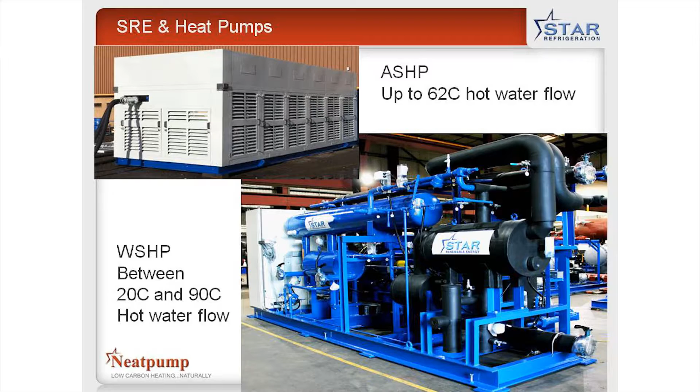And then there's the water source ones, which are the first thing we got into. And we've done several of these. We've done one that takes heat from a fjord. We've done one that takes heat from the cooling process in a dairy in the south of France. There's one that takes groundwater underneath Zurich. There's one that takes heat from the new harbour that they built for the Norwegian army.

And the most recent one is taking heat from a solar farm where the heat is given to us at about 55 degrees and we boost it up to 80. I'm not going to say too much about that today. It's more about the water source ones. So here's a picture of Drammen. 6 very large heat pumps totaling 13.2 megawatts of heat capacity at 90 degrees.

The source of heat being that fjord there, which despite the surface temperature obviously going quite cold, at depth at about 40 meters it stays around about 8 degrees all year round, which is very fortunate because that's not a bad temperature to start with as a heat pump.

The key thing for this is the capacity that they're getting. This is a 28 megawatt facility, this building here, which is made up of 13 megawatts of heat pumps and 15 megawatts of gas boiler. And yet, the part that's 13 megawatts, so less than 50%, delivers around about 85% of the annual heat demand for the building. So it's the first place they go to for heat.

There's a very simple reason for that. It's not because they're tree huggers. It's entirely down to the economics. They can make heat in Norway for about 1 pence per kilowatt hour. They've got a pretty good price for electricity, and as a large customer, they can burn biomass elsewhere in the network at about 3 pence, and they can burn gas at around about 5 pence. So 5 pence or 1 pence. So fairly obvious why they run the heat pump so much.

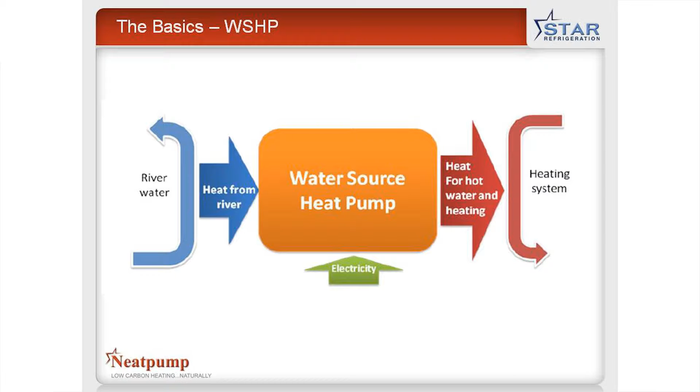The air source heat pump is kind of similar, except it's air that's coming in. All I'll really say about air source heat pumps is consider the climate in the UK. We genuinely do get about 3 weeks of summer, 3 weeks of winter, and 46 weeks of sprautumn. It's a fantastic climate for air source heat pumps because it's never terribly cold. You know, we don't go skiing and we don't have to de-ice our cars terribly often. So this whole thing about, oh, it's too cold for air source heat pumps, it's really not entirely true.

There definitely have been some bad examples put in, but done correctly, and that's what we've done with this one, we've got a very good defrost system on it that's automatic, and basically we're seeing the temperature between 0 and 10 degrees much of the year. So not terribly exciting, but it's a good place for air source heat pumps.

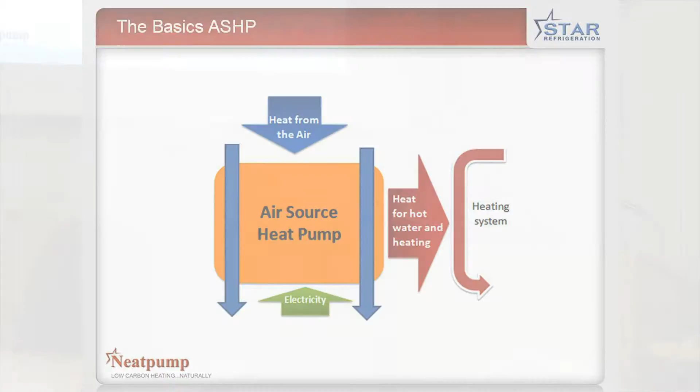So what do we think of as large scale? Well, heat pumps, typically if somebody was saying large heat pump, they'd be meaning 50 to 100 kilowatts. That's clearly much smaller than what we're talking about. Actually, the capacity is really just down to how much heat you need and what the right size is. You don't want to make it too big because then it will be sitting not delivering. It's only saving money when it's running.

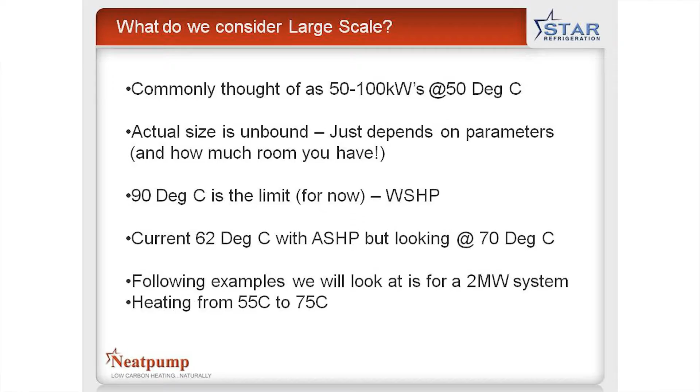And equally, we've got to think about the temperature very carefully. We can get to 90 degrees if it's large enough, but it probably doesn't make sense to go to 90 if you can go to 80. And I'll say a bit about that in a second. Currently with the air source heat pumps, we're kind of limited to about 62 degrees. We might get up to 65. If we use a natural working fluid, we could maybe get up to about 70. But again, the cooler temperature is better. So this is a housing estate that's going to work at district heating at 62 degrees. So really much, much better than what would be considered industry average.

So let's look at a couple of systems to try and look at some of the factors that affect it. So this is for a 2 megawatt system, and we're heating from 55 to 75. I would contend that 55/75 is broadly speaking going to displace a gas boiler that's been running at 82/71. The reason for the 71 or 72, depending which way you take it, is to keep the flue temperature in the gas boiler high enough that there isn't condensation happening in the flue. But if we're not running the gas boiler, then we can use whatever temperature is enough to keep the building warm. So we'll go for 55/75 and just look at some of the aspects.

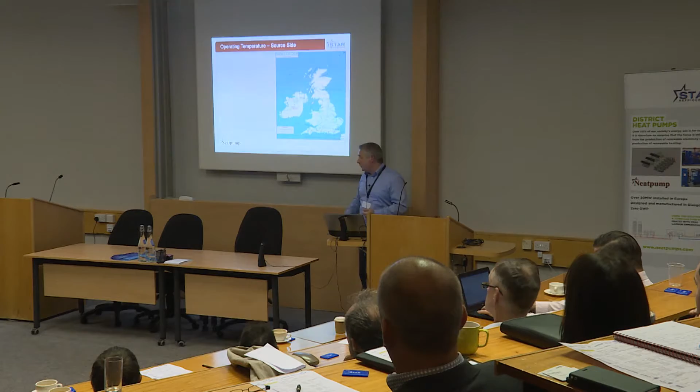What's the source of heat? Well, we tend to see a lot of interest in rivers and the sea for the simple reason that there's lots of blue on that map and it keeps raining. Not quite at the moment, but probably will do at some point this week. Industry heat, we could recover heat from industry. Sewers, the guys from SHARC are here and have done some fantastic projects where they're recovering heat from the sewers. There's some experts in the room about boreholes and groundwater. Or canals, there's some experts in the room about the canal network, it's extensive. Or groundwater being pumped out, cooled and put back again, so open source loops.

Or my particular favourite, I have to admit, is rivers because there's so many of them in the UK and they're so big. That's a picture of Glasgow. And principally, when you think about it, most of our towns and cities exist next to rivers for a variety of historical reasons going back thousands of years to do with fishing and water and defence and transport and industry and so on. So the cities all tend to be on rivers. If they're not, guaranteed they're fairly close to large sources of water, be it sewage treatment plants or whatever.

So the only thing to really consider is the heat pump doesn't care about the source of water, so long as it's following these sort of principles. How accessible is it? Clearly you don't want to use a source that's 2 kilometres away because that's going to be quite expensive. How big is it? Clearly you don't want to spend an awful lot of money and go after a relatively slight source of heat.

How cheap is it to get the heat from that source? How predictable is it? You know, can you say with absolute certainty that source of water will still be there? How safe is it? You know, are we talking about doing some groundworks that might be disturbing anything? How durable is it? And particularly over the course of the year, we certainly don't want to see something that's not viable just when we need it. So we're trying to get as durable.

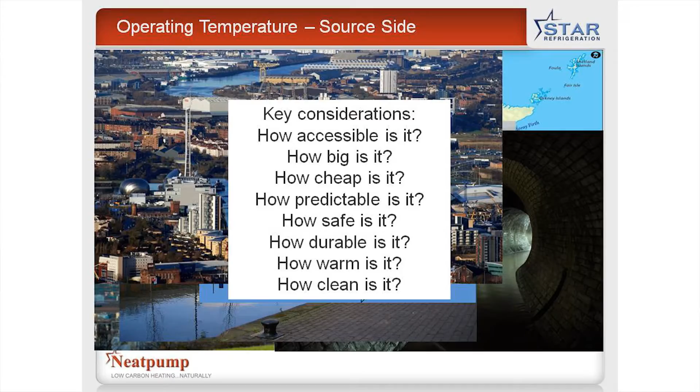Just having a quick look at the cost of it, we live in a world where there's an incredible amount of incentive for it, but let's take a fairly tough example of electricity at 10 pence and an efficiency for the heat pump just over 3. So we'll be making heat for 3 pence. Equally, if we're buying electricity at the right time of day, we might find that the electricity is cheaper. There's an odd thing between electricity and gas. Gas is the same price every half hour of the day. Electricity is up and down. It's even negative at certain times of the day. We're paying wind farms not to produce electricity. Equally, if you bid on the market and say, I will switch my demand on, you can get a good price for electricity. So there's an aspect of that where we might have a better situation.

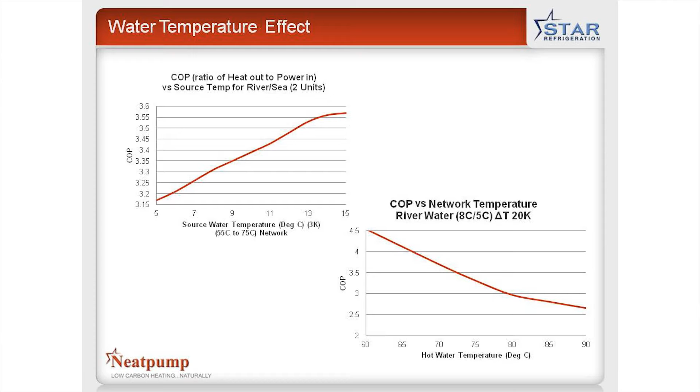There's then the RHI, the Renewable Heat Incentive. It still exists. It's reckoned to be carrying on for at least another 5 years, and it pays 8.7 pence for the first 15% of the rated maximum output. So a 2 megawatt heat pump would pay the first 1,314 hours times 2,000 kilowatts at 8.7p, and then the remainder, and it's metered, it's not deemed, so the remainder at 2.6p. So at best, if we're getting electricity at the right time of day, and the first portion of the RHI, we're making heat for minus 6.6p. So if this is a commercial consideration, that's clearly a good place to be.

Got to think about where we're getting the water from as well and what the costs are. Certainly up in Scotland, SEPA, the Scottish Environment Protection Agency, have basically said they want to be not just the policemen for industry, but the supporters of progressive solutions. So we're seeing that they're making the system as easy as possible on these rivers. Now, quite clearly, there's easier bits of rivers and harder bits, so a prime salmon fishing part of the Tay is clearly going to be different from the middle bit of Glasgow. So thinking about where that is, but they're keeping the fees low.

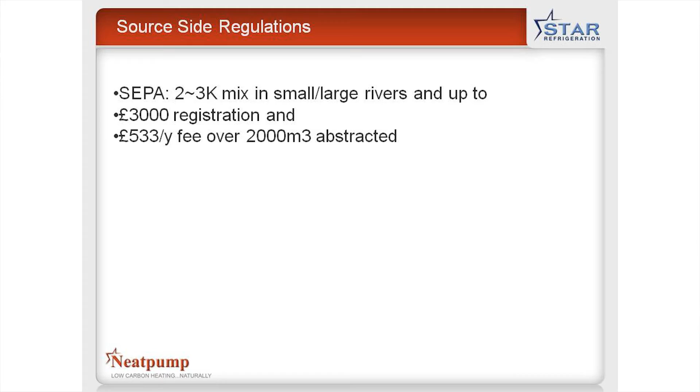So, in summary, heat pumps do work above 50 degrees. There are lots of sources of heat. Network design affects the outcome. They do get better as the grid decarbonises. And to go back to this chart, we'll call it the Paul Woods chart just for clarity. We're in here at the moment, right now, about 355 grams. So we're definitely round about this bit here. And we do have to be very careful of what's happening, but my view is that if we do it, it's not too bad at the moment, but everything is moving to the left, then fortunately we've picked something that gets better over the next 5 years, 10 years, or 15 years. So it's a good time to be thinking about that.

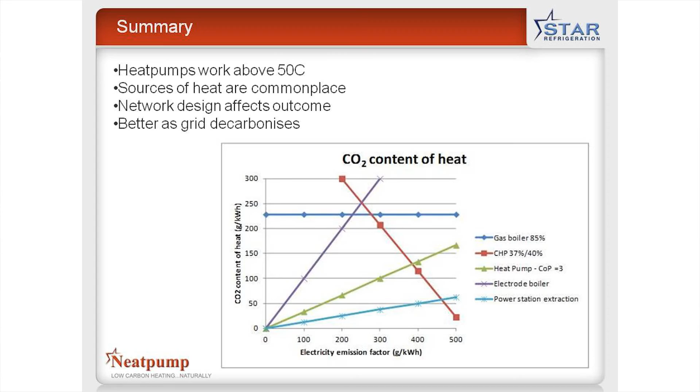What this graph doesn't show is two things. Firstly, that's still based on a COP of 3, which is a little bit miserly. And secondly, it doesn't say anything about the useful cooling that we could do. So if we situate a heat pump in the right place, we could be doing heating for some customers and cooling for others. So a university has always got cooling activities going on. So we should be thinking about joining up heating and cooling as well.